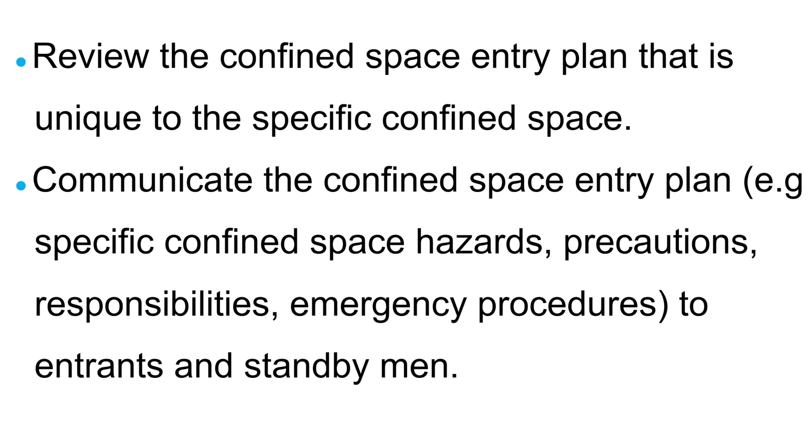Ensure proper work permits, confined space entry, hot work, etc., are issued. Verify all precautions of the confined space entry plan and applicable work permits are properly implemented. Designate qualified standby men who are fluent in the language needed to communicate with the CSES or rescue team. Verify entrants and standby men are properly trained.

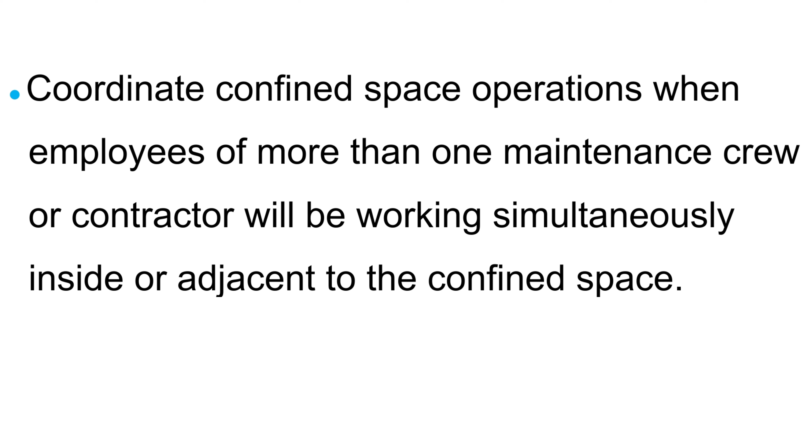Coordinate confined space operations when employees of more than one maintenance crew or contractor will be working simultaneously inside or adjacent to the confined space. Provide sufficient manpower and equipment for safe confined space entry and work inside the space. Verify the confined space is properly isolated per GI 6.012, purged and the atmosphere is safe to enter.

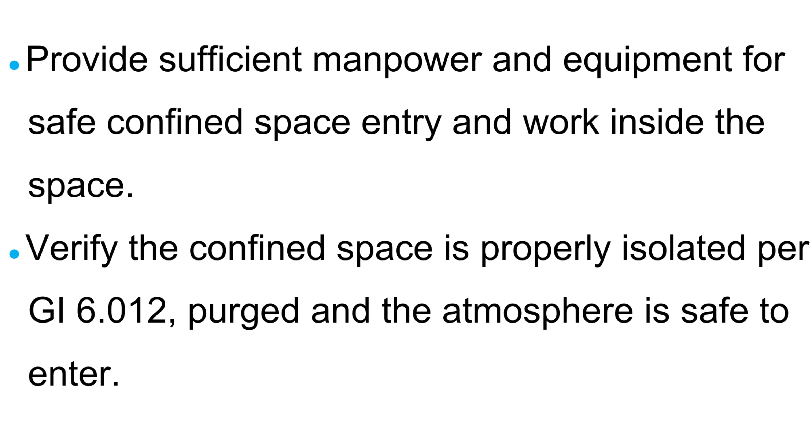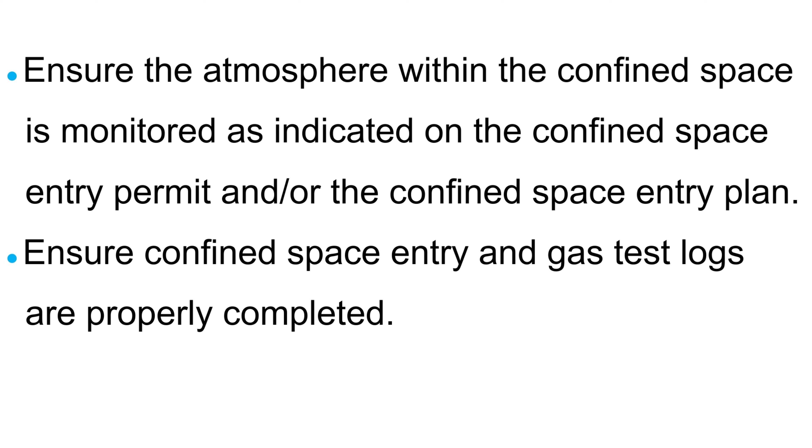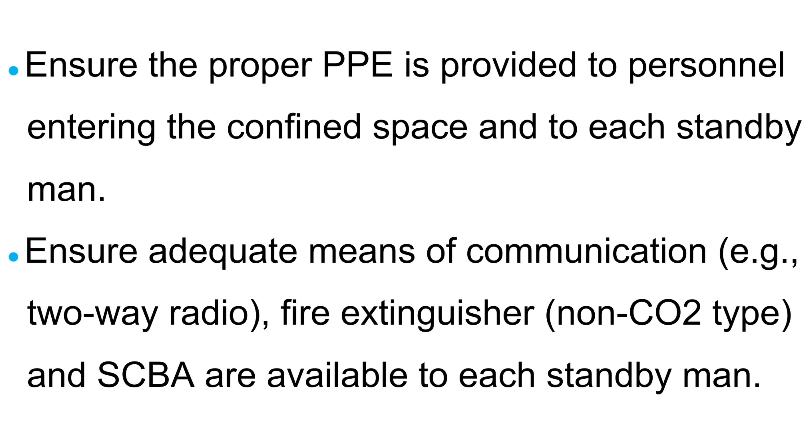Ensure the atmosphere within the confined space is monitored as indicated on the confined space entry permit and the confined space entry plan. Ensure confined space entry and gas test logs are properly completed. Ensure the proper PPE is provided to personnel entering the confined space and to each standby man. Ensure adequate means of communication, for example, two-way radio, fire extinguisher, non-CO2 type, and SCBA are available to each standby man.

Verify rescue equipment and a rescue team are available in the event of an emergency requiring evacuation of the confined space. Ensure the confined space entrance is barricaded and blocked and a no entry sign posted if the confined space entry is suspended. Terminate confined space entry and cancel work permits as necessary, for example, unsafe conditions develop.

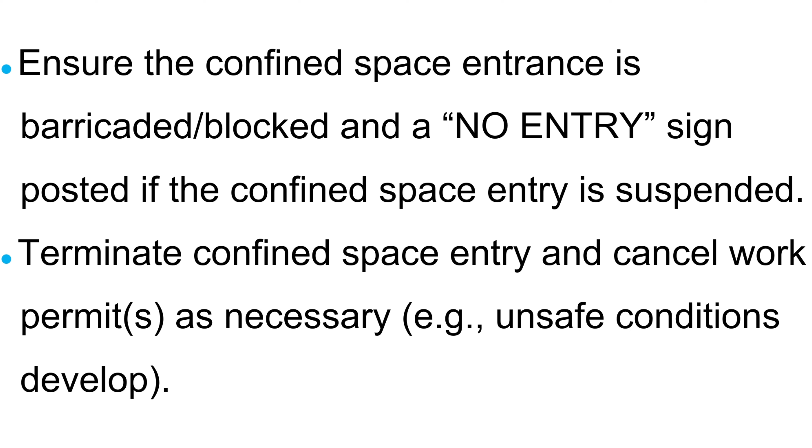Confined space standby men shall review the confined space entry plan and applicable work permits to understand the confined space hazards, precautions, responsibilities and emergency procedures. Understand the effects of exposure to potential hazardous substances in the confined space. Maintain a confined space entry log and maintain a continuous count of entrants. Prevent unauthorized personnel from entering the confined space.

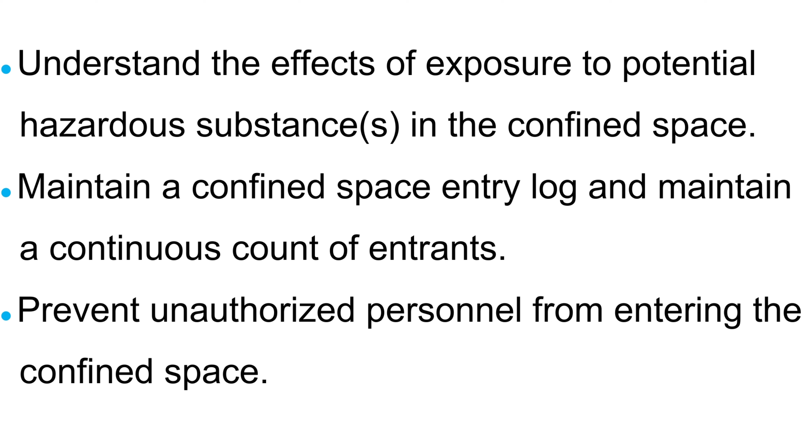Monitor activities inside and outside the confined space to determine if it is safe for entrants to enter and remain inside the space. Maintain two-way communication with entrants to monitor entrant status, for example, behavioral effects of hazard exposure, and alert entrants of a need to evacuate the confined space. Have communications equipment readily available on-site and immediately notify proper personnel, for example, CSES, rescue team, in event of an emergency.

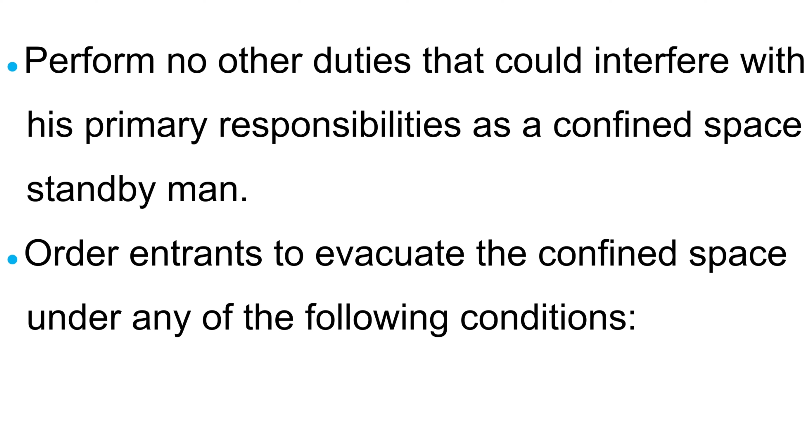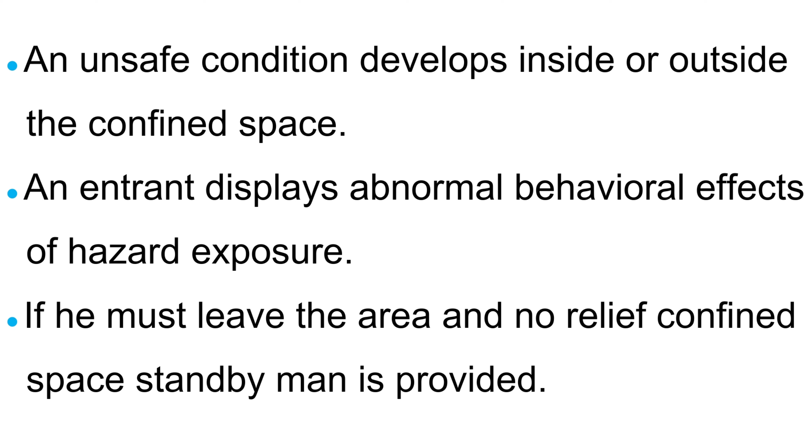Remain at the confined space entry point until relieved by another designated standby man, or until all entrants have exited the confined space. Never attempt to enter the confined space, even in an emergency, until relieved. Perform no other duties that could interfere with his primary responsibilities as a confined space standby man. Order entrants to evacuate the confined space under any of the following conditions. An unsafe condition develops inside or outside the confined space. An entrant displays abnormal behavioral effects of hazard exposure. If he must leave the area and no relief confined space standby man is provided.

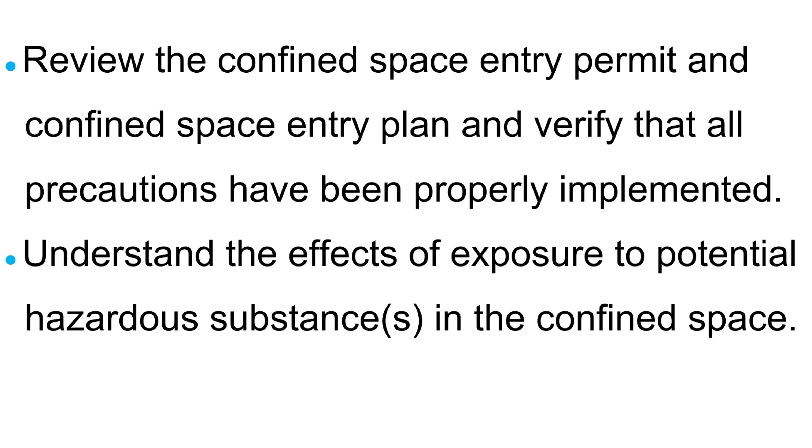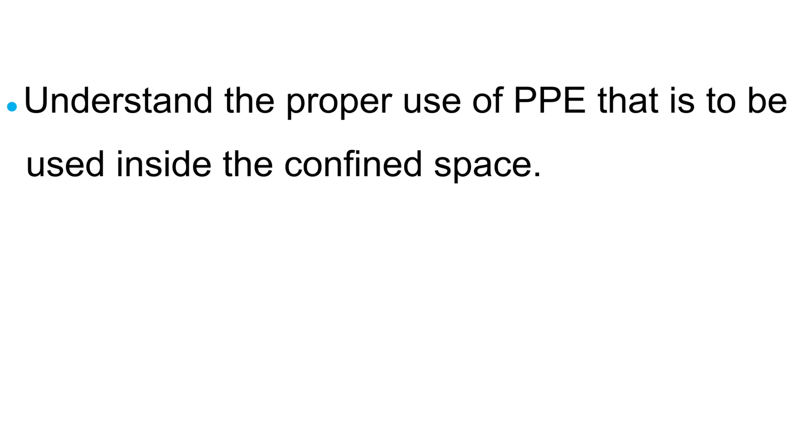Entrants into a confined space shall review the confined space entry permit and confined space entry plan and verify that all precautions have been properly implemented. Understand the effects of exposure to potential hazardous substances in the confined space. Understand the proper use of PPE that is to be used inside the confined space. Not enter a confined space until they are satisfied that all necessary precautions have been properly taken to ensure their safety and they clearly understand their work assignment within the space.

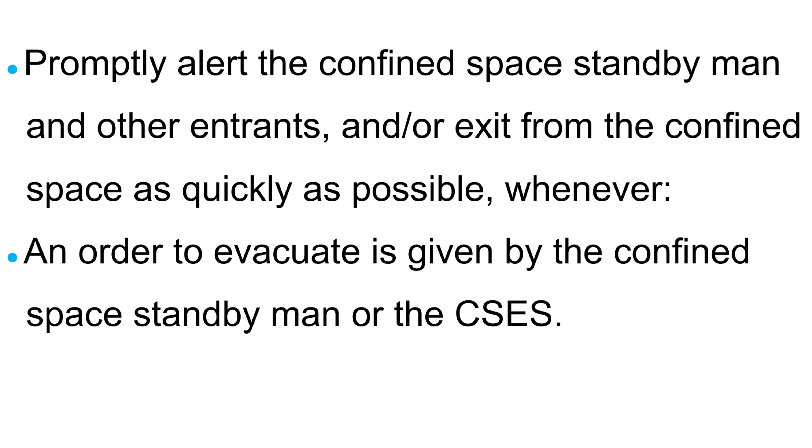Communicate with the confined space standby man to enable the standby man to monitor the entrant status, for example, behavioral effects of hazard exposure. Promptly alert the confined space standby man and other entrants, and exit from the confined space as quickly as possible, whenever an order to evacuate is given by the confined space standby man or the CSES, the entrant recognizes any warning signs or symptoms of exposure to a hazardous condition or substance, or an emergency alarm is activated.